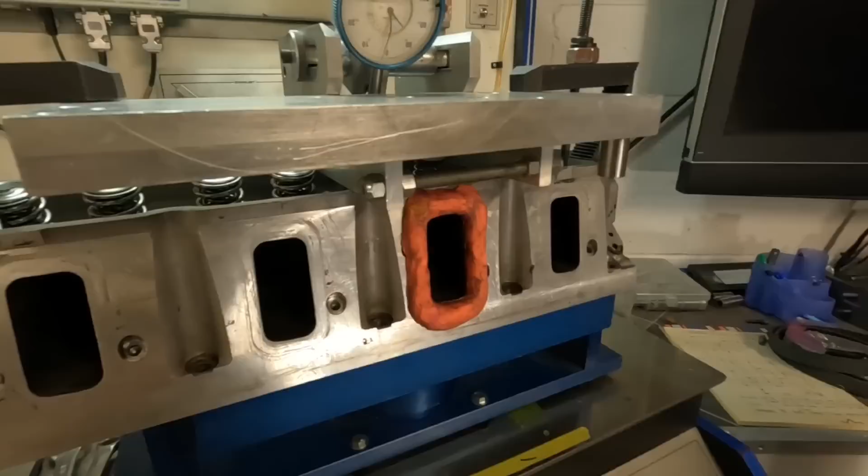I'm going to call my buddy Sammy. David and I wanted to do something completely different with this AFR cylinder head test. We wanted to bring you the flow numbers we've seen on the flow bench, the chassis dyno numbers we witnessed at the rear wheels, and then drag strip ETs from the drag strip. In order to do this, I knew there was only one person I could call on to make this happen: Sammy Pacehour, Boost Is My Friend.

You've seen him in my videos before. He has this little S10 pickup truck that he's dubbed Work Truck. It has an LS3 based engine in it, 416 cubic inches with a turbo 400, a Ford 8.8 with 3.55 gears. This truck gets down - it runs the 8th mile in the 6.50 range on motor, mind you. But the key to that is it weighs like 2,900 pounds, give or take. What I would give for Casper to weigh that.

We decided that this was going to be a multi-channel collaboration between Boost Is My Friend, Nigel from Nigel ST - he's the tuning guy - myself, and David Vizard. So 4 channels to bring you this type of content and give you the most accurate real-world results that we possibly could. So here's how things went.

I took the initial set of AFR heads over to Sammy's house for him to swap onto the work truck.

What's up, LS boy? How's it going?

Let's see what we got in here. Look at these presents right here. Oh my God, man! It's like I'm a kid in a candy store. Look at that! It's Christmas in February.

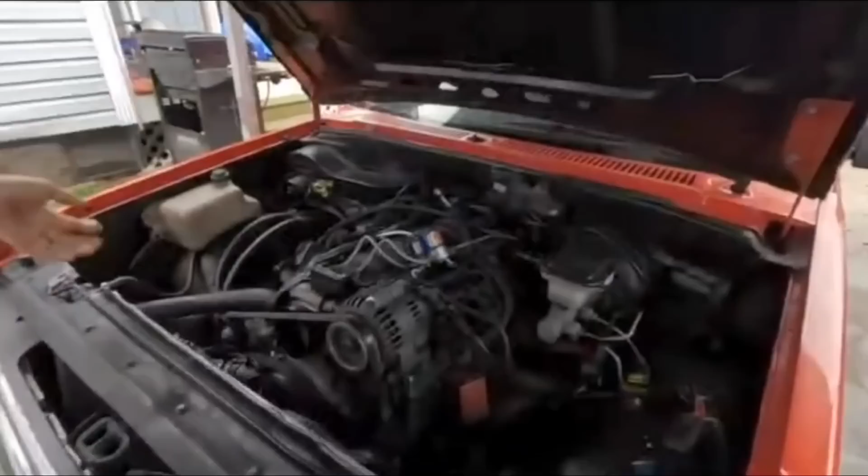I'm telling you, so this is the work truck, folks. If you look at this bed, this truck is the work truck. It ain't nothing special, it's always been the lowest dollar thing we have to spend money on. Stock suspension stuff. It's a 416, has a Liberty crank, some Callies rods, a CP piston in it. The heads are stock ported heads - just stock ports on the head. The heads have been decked because the last motor had a low compression piston, so I'm pretty sure we took 40 thousandths off of it. We're going to measure them because we're going to make those the same.

Sammy and I were talking to make this as much of an A/B test as possible. As soon as he gets these heads off, we're going to CC the chambers, find out what they are, and then we're going to shave the AFRs to match. That way we eliminate that variable. We're going to eliminate it.

But like I said, it's a stock PCM, I'm going to send it. Nigel has always done my tuning - Nigel ST is his YouTube channel, I'll put it in the channel. I was saying small tire for some reason, but it's Nigel ST, that's his YouTube channel, and he's the one that always does my tuning. It's a stock computer, the wiring harness ain't nothing pretty. It's got a little bit of nitrous on it with a little plate. This thing has Monroes on the front of it. I mean, it is legit.

No suspension to it, other than having CalTracs on it and an 8.8 under it. You got a Ford part on this thing?

Yeah, so with this truck, Turbo 400, it's got an FTI converter in it. It was a Yanks converter, FTI restalled. I don't even know the stall speed on it, I bought it secondhand off Facebook Marketplace.

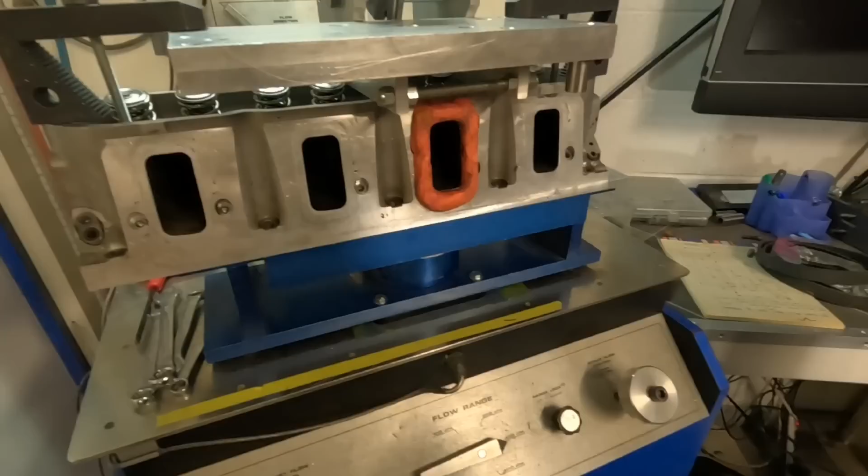It just works, folks. So like I said, this thing right here has just been like a little street truck. Once he got them swapped out, I picked up his LS3 stock head. It's a casting number 821.

Folks, these things are awesome. Now, I'm not an LS guy, but I can see why people gravitate towards this engine, because this head is extremely good as cast from GM. My only complaint is this cylinder head is a little too big.

What this reminds me of, between looking at this and the older cathedral ports, this is actually an 806 casting. The way I view this is pretty much a Cleveland style head, and that's pretty much like your mundane Windsor. Now, you GM guys will probably hate on me for saying that, but that's just the way I see it.

These big ports move some big air, as cast, big valve, and we're going to get into the results that we witnessed when we compared the new AFR Enforcer. Show you the flow numbers, what they mean, how we interpret them, and go from there.

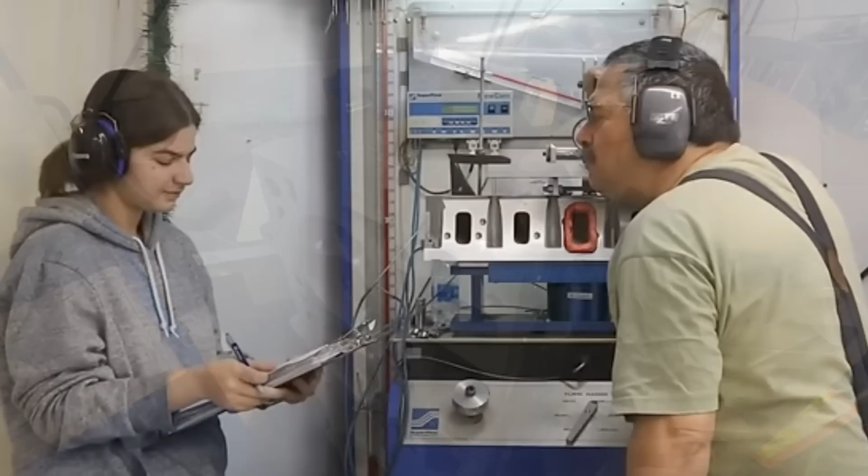When Charlie Servideo was up here from Florida, he actually flow tested this head, him and his daughter Carla, and then I flow tested the stock head. We run them through David's IOP program, and let's get into the results of what we see on the bench here.

So just comparing flow numbers, you really can't tell much difference between the two heads, other than the fact that the new AFR head beats it in certain areas and excels in the upper lift ranges.

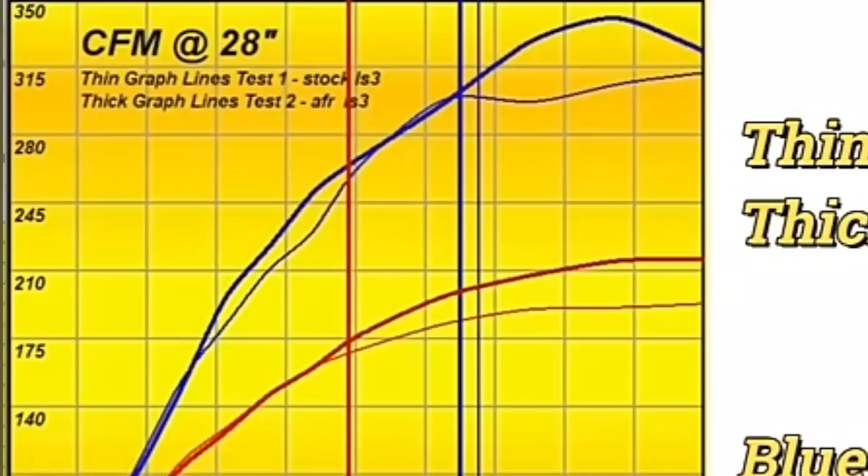But flow numbers itself does not tell the story. You really need to look at the discharge coefficient to find out how efficient the port is and its potential for making power. Looking at this number, you can see that the AFR is a much more efficient port.

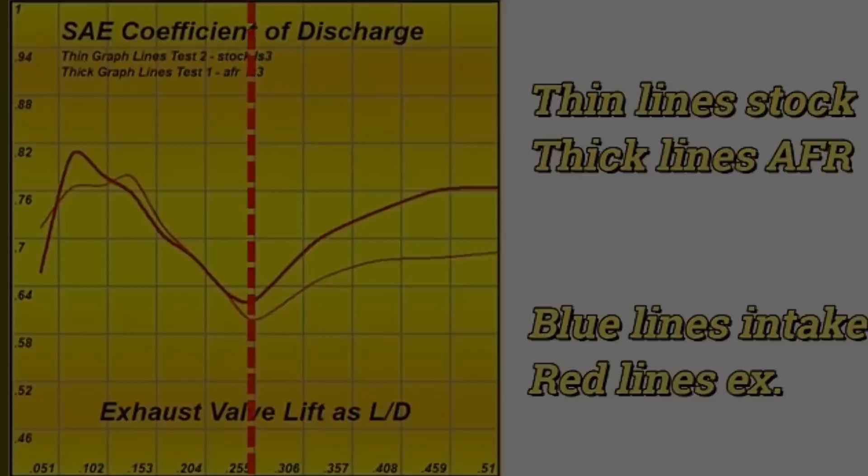That's because as I measured the stock casting, which was a 258 cc intake runner compared to the 238 cc runner with a 2.08 valve versus a 2.165 valve, you can see that the efficiency swings in AFR's favor. It is obvious that AFR did an extremely good job designing these cylinder heads, even though it's up against a very competent stock competitor.

So now we know the flow results that we've seen. We were guessing just how much power the AFR head was actually going to be worth over the stock head. We had Charlie guessing 30 horsepower, I think I guessed like 15 horsepower, and David was like 20, 25. Basically, I'm going to show you the dyno results, and then we'll talk about that.

So that's pretty interesting to find out what actually happened at the rear wheels. You see that it had really good power gain down low, all the way up to about 5,400 RPM, and then it diverged, it nosed over, and then the stock head continued, and then it nosed over, but the AFR continued flatline. So now, how do you interpret those results?

Now, based off of the flow numbers that we achieved with the cylinder head and the efficiency of the cylinder head, David and I come to the conclusion that basically we feel that the camshaft that's in this truck is wrong. Now, there'll probably be a bunch of hate about this, but I will explain it, because this goes back to one of my earlier videos about LSA and camshafts.

Now, the camshaft that's in Sammy's truck, I'm going to put a picture of it up. As you can see, it's an older discontinued Brian Tooley Racing camshaft. It's ground on a 114 LSA. Now the LS guys will say, well, that's normal.

LS loves wide LSAs. Well, with the big valve combination head, apparently it did, but once we put the smaller 2.08 AFR head on there, we believe that in order to get the max potential out of this, a cam swap is in order.